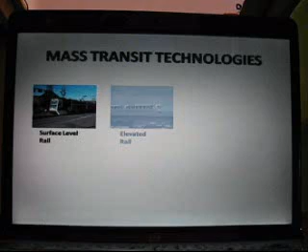Mass transit technologies: surface level rail, elevated rail, monorail, and bus rapid transit. All are engineering solutions to help us get from point A to point B.

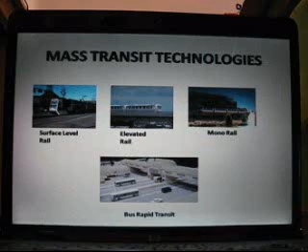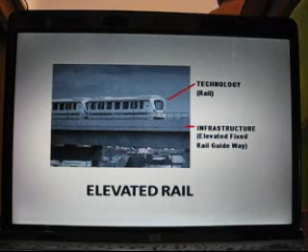Elevated rail technology includes an infrastructure made out of concrete, which is the elevated fixed rail guideway to support rail technology. Infrastructure, before and after.

Does this massive concrete infrastructure belong in the beautiful islands of Hawaii? I think not.

The Straddle transit system is an alternative engineering solution that incorporates infrastructure and technology into a specially designed vehicle that straddles traffic congestion.

The Straddle transit system is designed to transport people, services, and goods upon existing transportation corridors and respond to emergencies or national defense.

The system includes straddle vehicles, straddle fixed guideway, straddle passenger stations, and a straddle traffic management system.

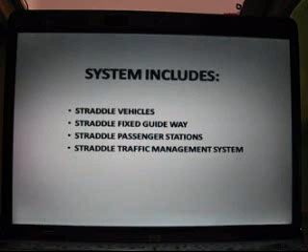Straddle technology is currently being used down at the shipyards, in agriculture, and in the monorail system to straddle the center beam. Our system straddles traffic congestion.

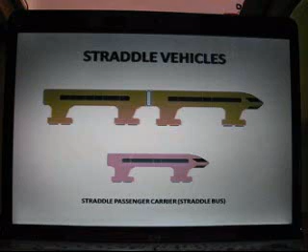The straddle vehicles include a straddle passenger carrier, which we have named Straddle Bus.

To get the gist of this story, you have to look past these props and into the mind of Eric Nelson. I'm an innovator, a simple innovator, and I see a solution to some major problems that we have.

This is his answer to Oahu's traffic mess. A space-age looking vehicle that he called a Straddle Bus.

A personal transportation shuttle to transport segways, mopeds, electric wheelchairs, and smaller electric cars.

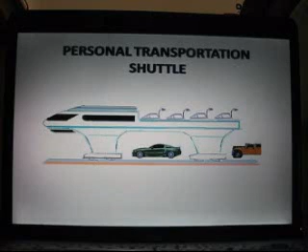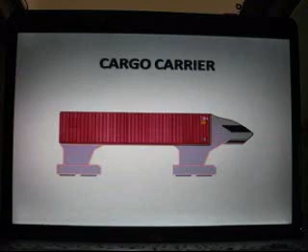Cargo container carrier. Emergency service vehicles. And armed service vehicles.

These straddle vehicles are composed of a steel straddle chassis that is high enough and wide enough to straddle conventional passenger vehicles.

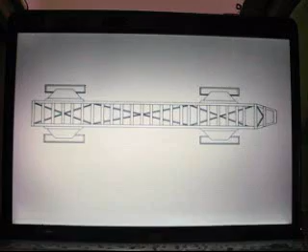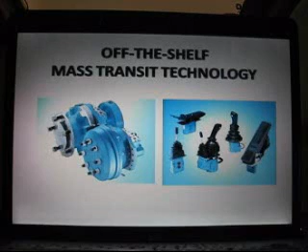Which are mounted with off-the-shelf mass transit technology. The straddle vehicles are rubber-tired vehicles that are specially designed to straddle traffic congestion.

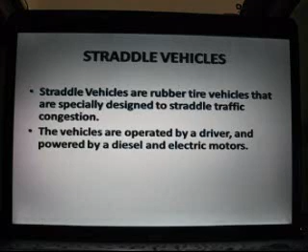The vehicles are operated by a driver and powered by a diesel and electric motor. The basic layout of each vehicle includes an operator's cabin, which includes power control, braking control, steering, and loading and unloading control.

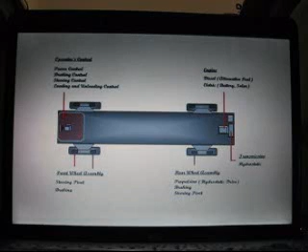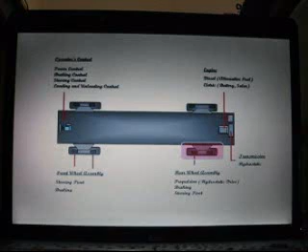Front wheel assemblies for steering and braking. Rear wheel assembly for propulsion, braking, and steering. And an engine compartment for a diesel and electric engine.

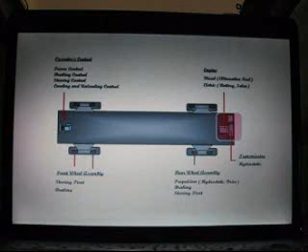This is the basic rendering of a straddle bus, which includes A, engine compartment, B, passenger cabin, C, operator's cabin, and D, wheel assemblies.

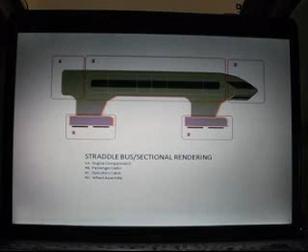The vehicle is a rubber-tire vehicle and can be steered like a conventional bus, where the rear axles are locked and the front axles articulate.

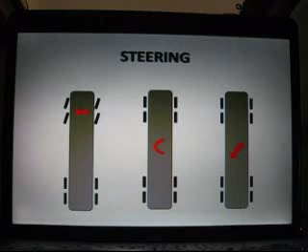Or the driver can unlock the rear axles and drive the vehicle in a tight turn, or drive the vehicle in a diagonal motion.